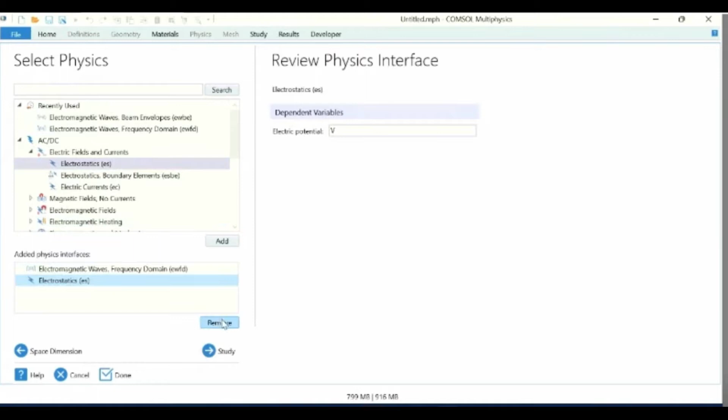The first one is EWFD, and the second one is electrostatics. So we will continue with these two physics in this experiment. General studies we can use for electrostatics. We are concerned with

The entire experiment has been divided into three phases. The first phase is to optimize the dimensions of the waveguide in which the light has to pass. The second step will be to optimize the distance between the waveguide and the electrodes that we are placing. And at the third step, we will see how the phase is related to the potential that we apply across the waveguides.

So, in first step, we will define the parameters. What parameters we require, we will put one by one. And since this experiment is an SOI based experiment, which means silicon on insulator, for the insulator we will be using SiO2, silica glass, and to extract the refractive index of silica glass, we will have to use the Sellmeier equation.

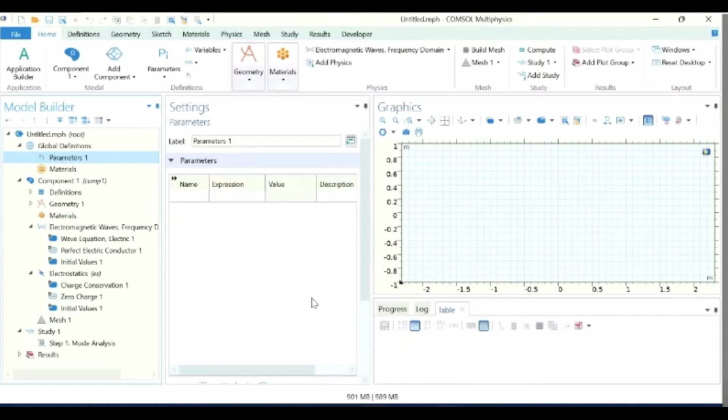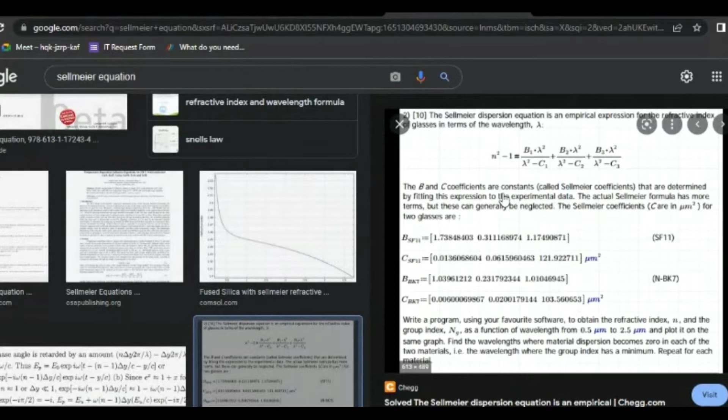So here we can see this is the Sellmeier equation. The Sellmeier equation is used to find the refractive index when any monochromatic light of one wavelength passes through the medium, through SiO2, and how the refractive index of SiO2 changes. As we can see, there are certain constants, and these are the coefficients that we will use.

Now we can define one more variable of voltage that we will use for giving the voltage supply across the waveguide. After this we can define the variables for defining the geometry. For geometry, there will be width, height, and length, or we can say the depth of the waveguide, as well as the electrodes.

So for height of electrode, we gave it 200 nanometers, which is a standard value of fabrication. This is the standard height that we very often use.

Width of the electrode. Now this parameter we have to optimize with respect to the confinement and the modal effective area. These will be the factors on which we will decide what is the optimized value of the width of the electrode. So for now we will just keep it 400 nanometers. This is a random value. Later in this meeting we will know what is going to be the optimized value of it.

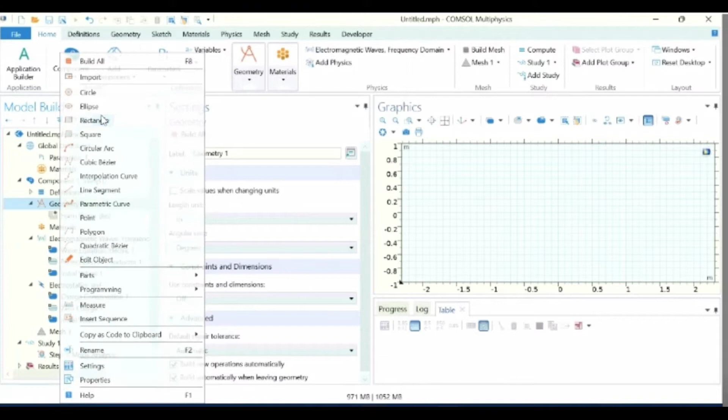So for that, we will define a rectangle, which we call waveguide. It will remain solid. What would be the width? So width will be W wave. Let's see what I have defined. Yes. So here it will be W wave, and here it will be H wave. Position will be from the origin, because we want to keep it symmetric, and base is going to be center, and everything is looking good. So here we will build it. So here we get the rectangular waveguide in which we will be injecting the light and analyzing.

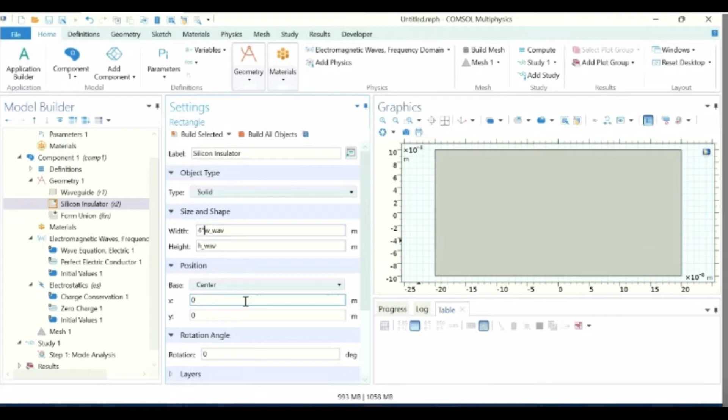After that, the next thing we have to define is the silicon insulator on which we are mounting the waveguide. So for that, let's call it silicon insulator. It will again remain solid. For the silicon insulator, what dimensions can we take? It depends on us. So we can take it like 4 into W wave and height of H wave. Let's see what I've taken here, then accordingly we can take it, although it really doesn't matter. Yeah, width of box. I have already defined other parameters.

Define a parameter. Width of box, and we can put any random value to width of box. Let's just try with 1 micrometer. Then it becomes width of box. And similarly, we can define H box. Let's say 800 nanometers. And change the values as per our convenience.

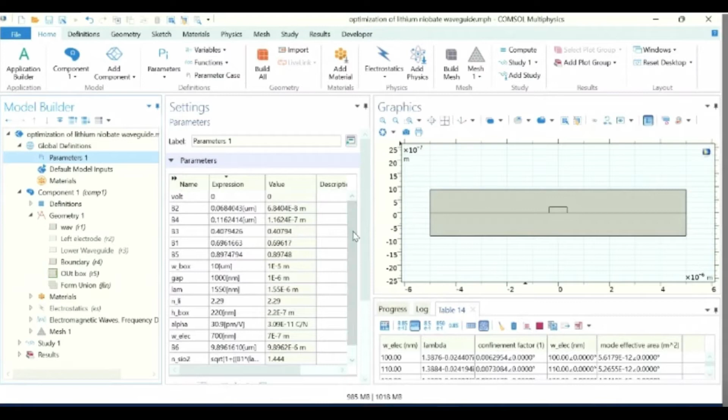Here we are using H box of 200 nanometers because the height should be 200 nanometers. Accordingly, we will make the geometry.

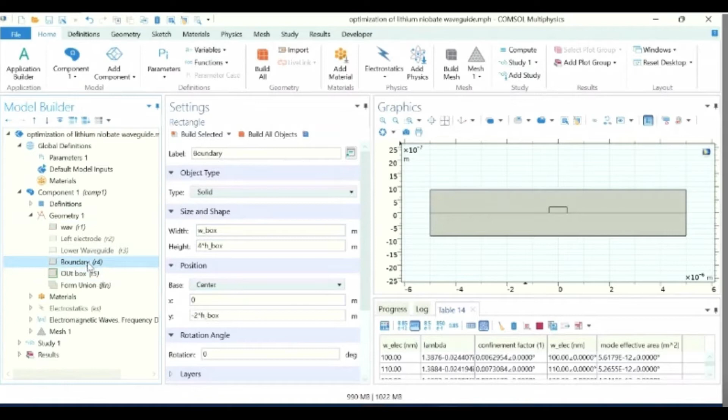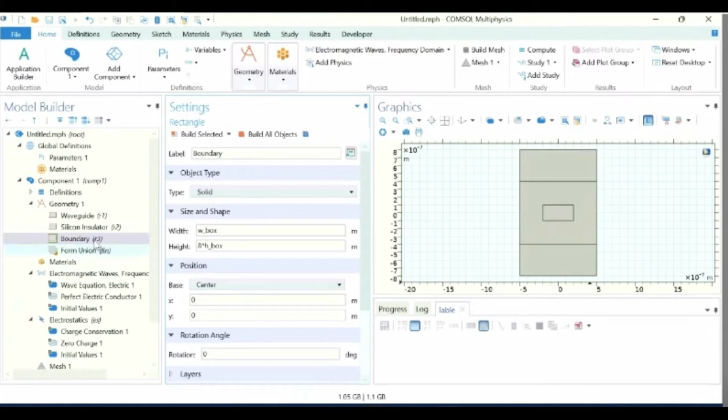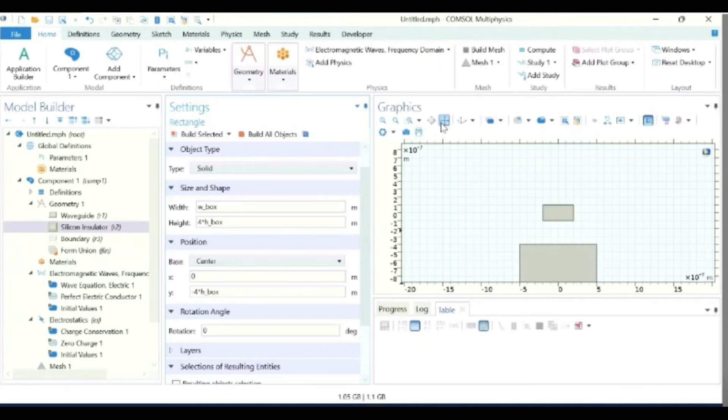And similarly, we define an outside boundary. Okay, so now we have to move down the silicon insulator because we want such geometry.

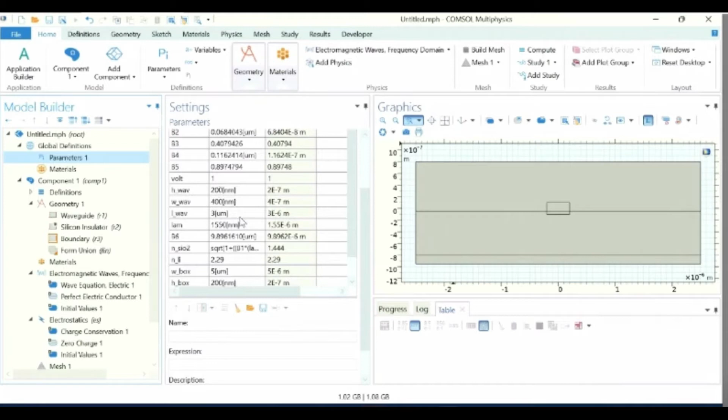So here our geometry is almost ready. If I summarize what I did in this geometry, this domain is the silicon dioxide, SiO2, silica glass, and this is the background. It can be embedded into it.

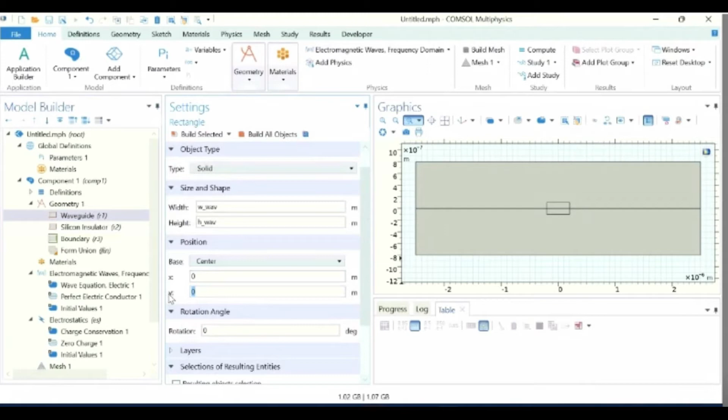So this is the cross section of the entire SOI system, on which the fabrication of the waveguide will be done. And this particular area, this small rectangular domain, is the waveguide that will be doped by lithium niobate.

After this, we will define the materials. For that, we will add materials from the library. We will add lithium niobate, so I will search lithium niobate. There are two options; you can use this one. So this is lithium niobate. One more substance I have to search is silica glass. Now I have two materials that I have imported.

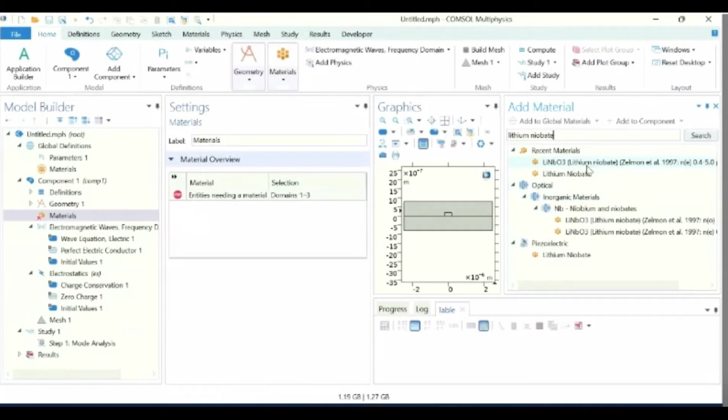Lithium niobate. First I will choose the domain. Only this domain is lithium niobate. In this section, refractive index, I will define the refractive index of lithium niobate, which is NLI minus 0.5 into... Now here I have to define one more parameter, which is the Pockels coefficient, or you can call it Kerr coefficient. It really doesn't matter. I will call it alpha, and alpha for this is 30.9 picometer per volt.

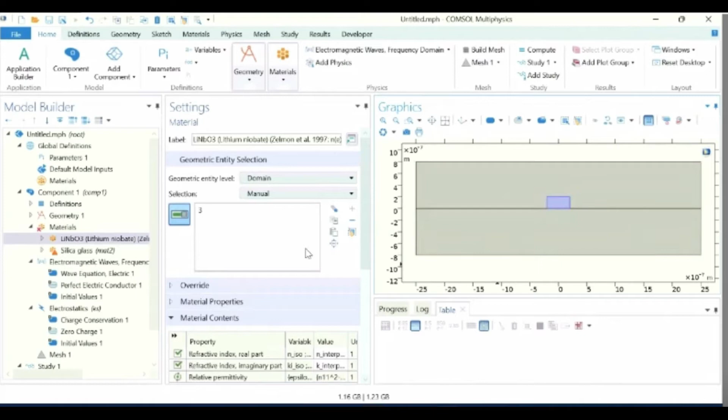I will use it in this definition of refractive index. NLI minus 0.5 into alpha into, sorry, NLI cube into es.normE. I think it's correct. Let me check. Here NLI is the refractive index of lithium niobate when there is no impact of electric field. So NLI minus 0.5 into Pockels constant into cube of NLI into the electric field.

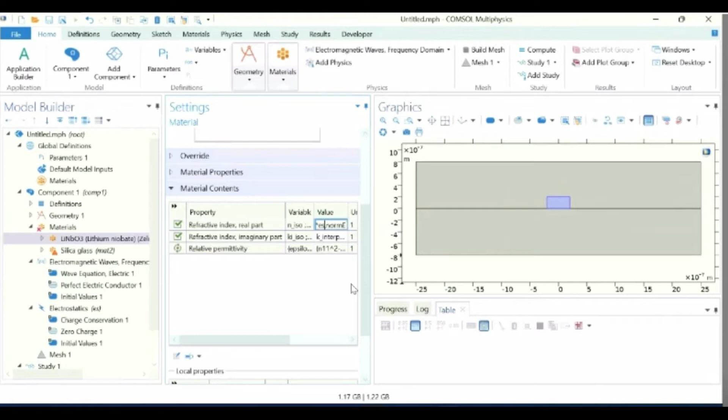Here es.normE is the electric field when the potential is applied across the waveguide, that is the lithium niobate structure. Since I have not defined any electrodes so far, because I'm not concerned with the electro-optic effect right now and I'm optimizing the dimensions of this waveguide, the electrode or potential is of no concern for now. So this term es.normE will become 0 for now. I showed this formula because I will use it in further parts of the same experiment. So here I'll just use NLI, which is 2.29.

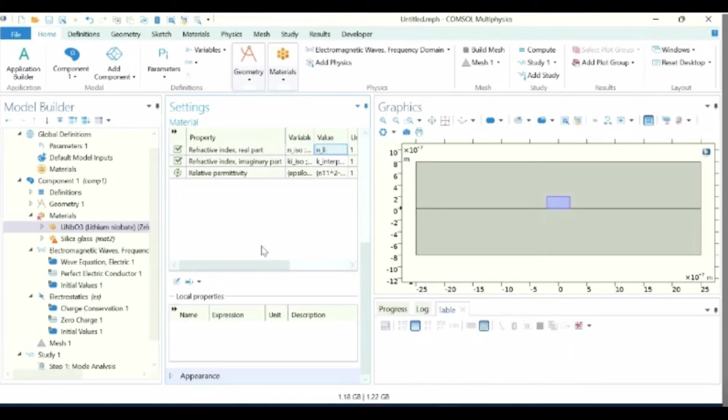Now let's define SiO2, the refractive index of silica glass. Here I will use NSiO2, which I have received from the Sellmeier equation. So this part of the job is done. Electromagnetic wave equation: let's check if it's correct. It's totally right. This formula is defined with respect to refractive index, and the refractive index is taken from the material we defined in this section. It's giving me some warning. I had not defined the domain, that's why it was showing the warning. Now it's resolved.

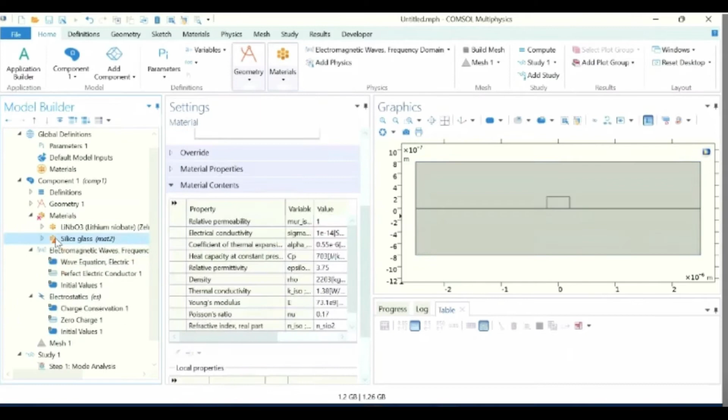Initial values, let's see. It's correct. Electric field initially has been put 0, so a zero initial condition is taken. Electrostatics is not required for now, so we can disable it; however, we will use it in the future. Now we will create the mesh, physics-controlled mesh. Free triangular for the entire geometry, extra fine, and build all. So here the mesh is created, as you can see it's good to go.

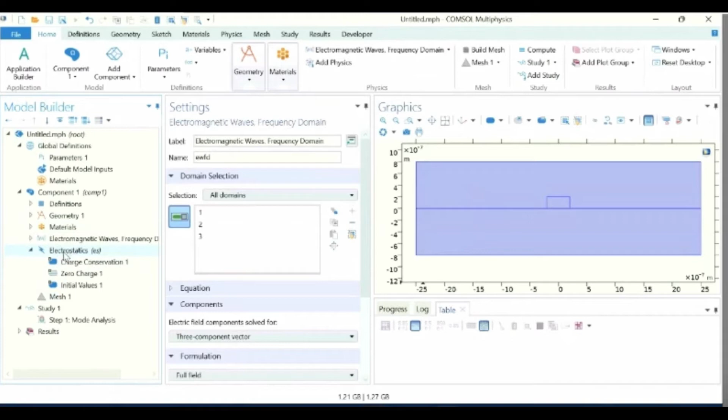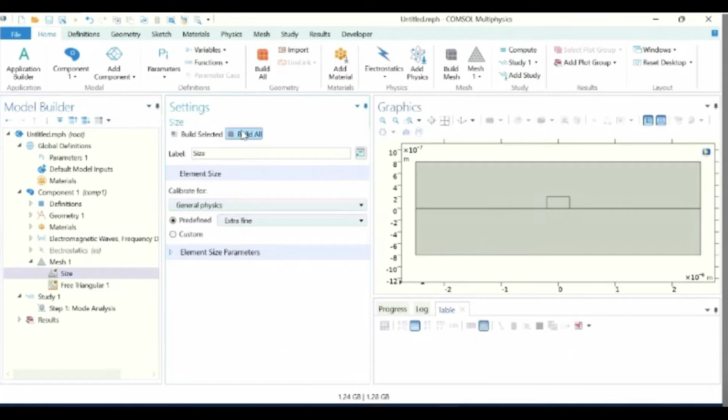Now we will do the mode analysis. Before doing it, you have to change the value of lambda. Starting with this mode analysis, let's find it for 30 modes, and a region around 1.4 is a good approximation. Compute. Okay, we are getting something, though it's not good. Let's check the others. As you can see, there are no modes inside the waveguide that are acceptable, not the ones we are looking for. So there are two options: this one and this one. Let me start again.

Once again, I will do the mode study, but now it's around 1.44, because in the last study, as we saw, we are getting a mode around 1.44. This time it will be only 2. So we have got these two modes.

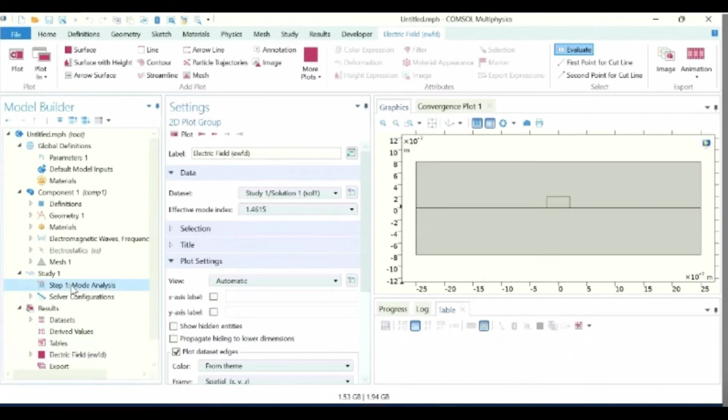Now, as we can see, not the entire power is being confined into it. What I'm saying is the entire mode is not being confined. What could be the reason for it? The probable reason why the mode is not confining into the structure and it's leaking outside is the width of the lithium niobate waveguide.

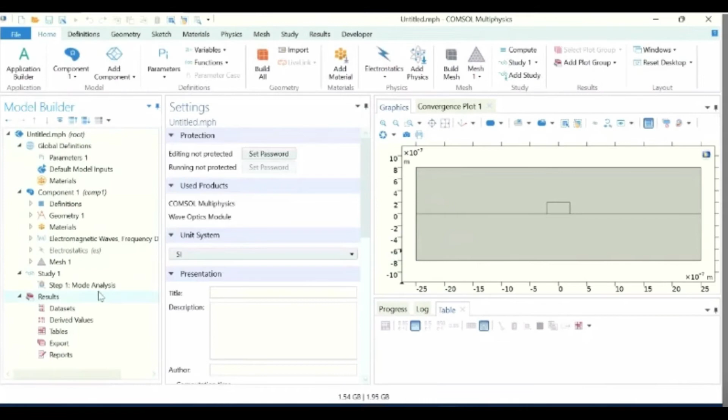So what we will do is implement a parametric sweep to see how this modal analysis changes with respect to the different values of the width of the structure. Width of wave, so we will define width of the wave. We can run it from 100 nanometers, step 10 nanometers, to 800 nanometers.

Nanometers, and everything is good. What happens? Wait for the output. It will take a while.

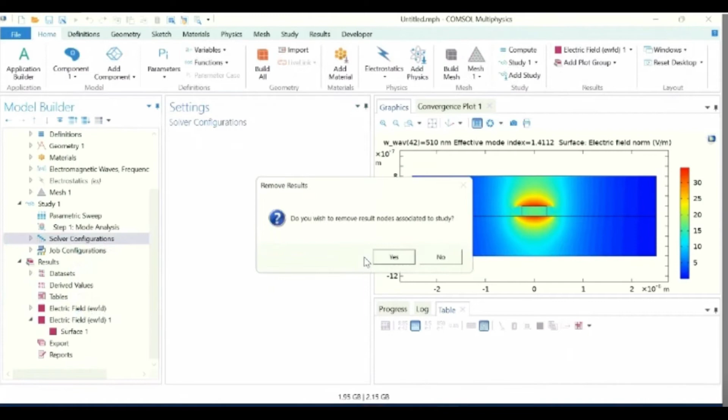Here we will have to define the scattering boundary condition. Since I did not define it, I wasn't getting the correct output. So you have to take care of this as well, that you properly define boundary conditions, because not defining the boundary conditions may give you the wrong outputs.

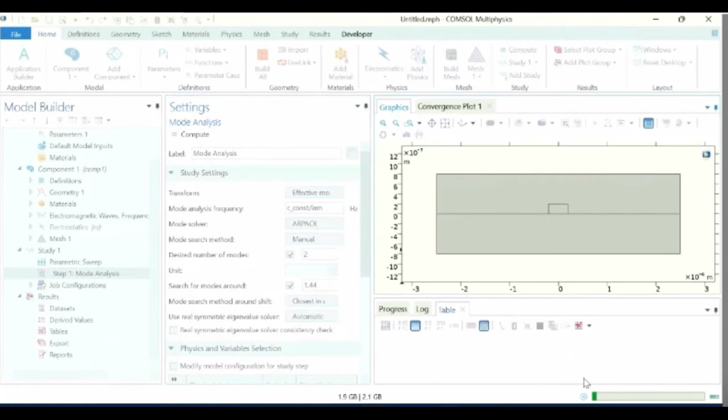Okay, now I'm getting better results. Now I can run the parametric sweep. Let's see what happens now.

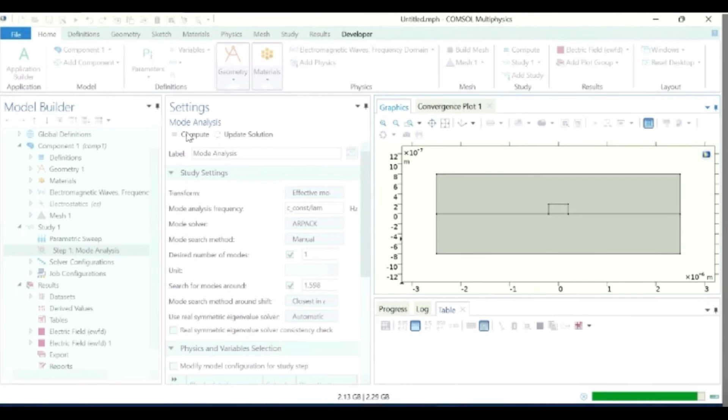So what we will have to do is find the power residing in the core, that is this particular region, divided by the power residing in the entire concerned structure. For that, we will define two integrations. Let me show you how we can define the integration. Go here, you get the option of integration. Let's say I'm defining this for the waveguide region integration.

I will use the domain. This is the domain in which I have to integrate, and it's integration order 4. Rest all is good, and the remaining one I have to do for the entire body, so entire geometry. I will choose the domain accordingly and in the same manner. Now I have defined two different integrations. Okay, I'm good to go.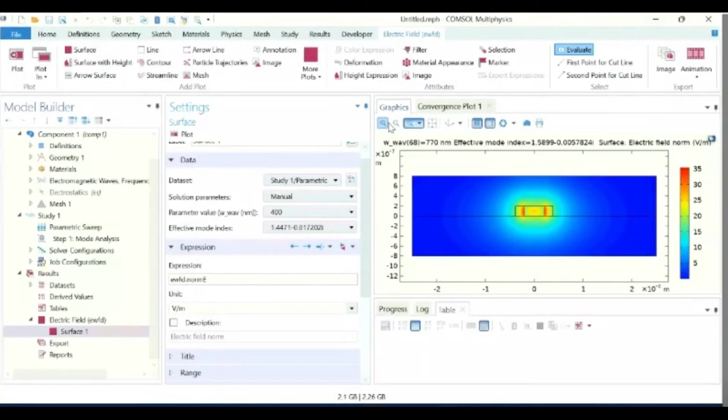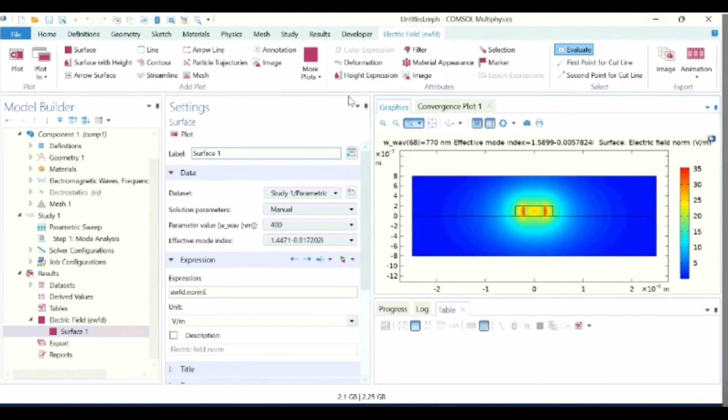Now here I can do the analysis of confinement factor and modal effective area using their respective equations. From here, you can use the integration that we defined previously, from non-local couplings. Here it is, intop1, so I will use intop1, and the parameter I have to use: I have to find the power, and the power can be evaluated using the square of the electric field.

So we can take the whole square for the confinement factor, and if I have to evaluate it as a percentage, I will multiply it by 100, and this will give me the confinement factor.

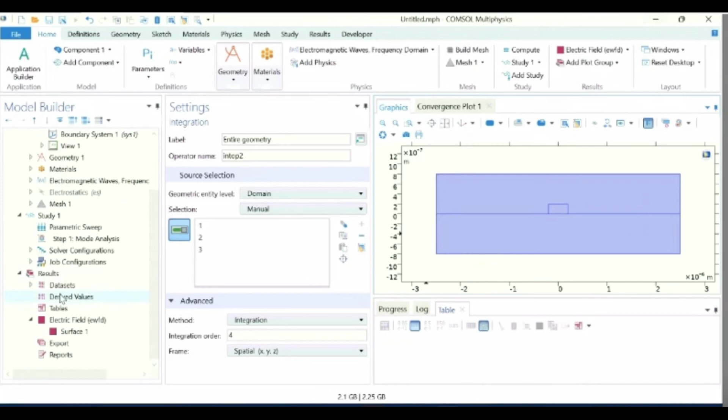Okay, our next target is to find the modal effective area. Let's see what the equation is for modal effective area, if I can find it, because it's really very hard to remember the equations of these values.

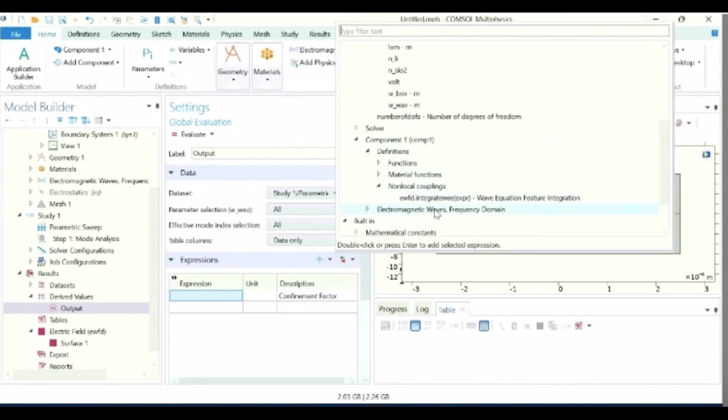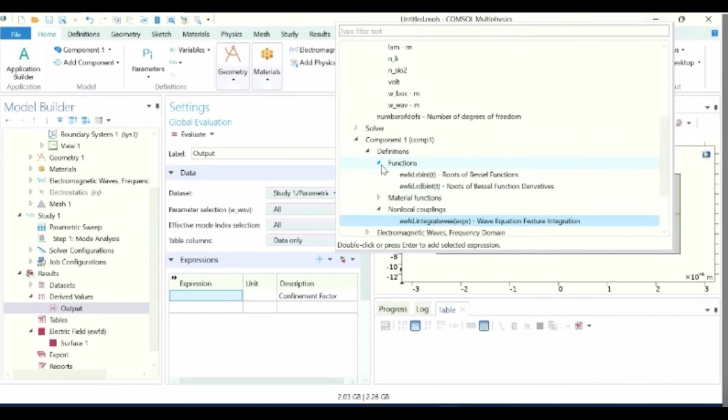Modal effective area. Okay, so here it is. I can use this equation. So it's the square of the entire integral divided by the power 4 of this integral. Whether this equation is correct or not, first we will implement and then we will check whether it's the right equation or not.

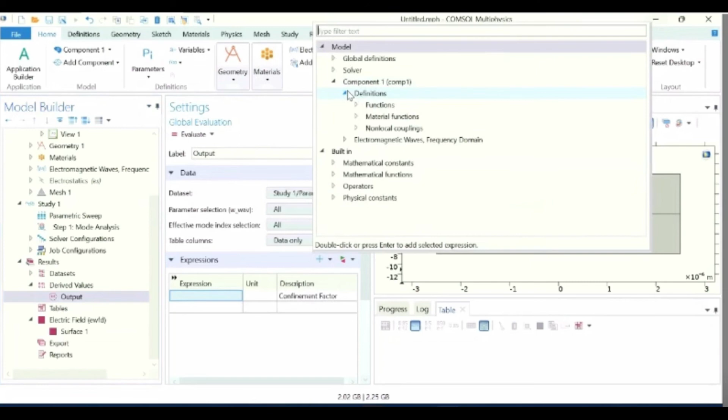So intop1 and ewfd.normE, the integral. Square of this integral. Square, oh sorry, square of this integral. So, square of this integral divided by intop2. Let's see, intop2 power of 4. So ewfd.normE power 4.

See, this is, yeah, we check it intop1: integration of square, square of whole, and integration of power 4. Is it the same thing? Yeah, it's the same thing. Okay, so the entire configuration has been set. This is modal effective area, and this is confinement factor. We will evaluate. Okay, have to rerun it.

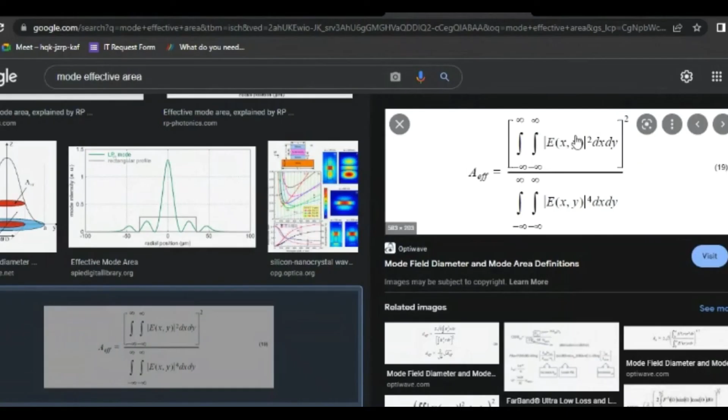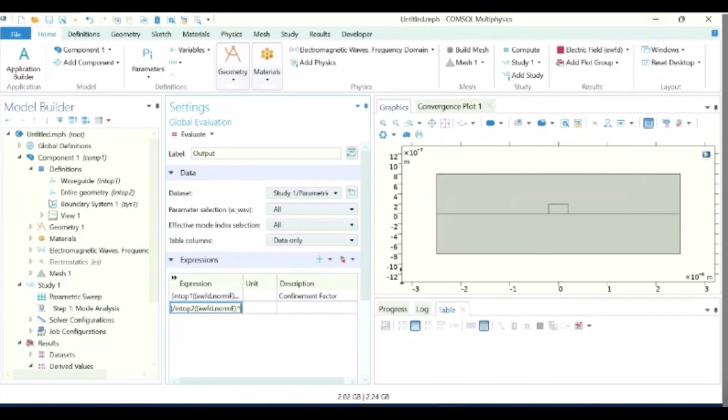Okay, so here I can see mode effective area and confinement factor. I think there's something wrong with this, because as you can see, it's displaying it as 1 by meter square, which should not be the case. Let me check what is wrong here. Okay. That part was wrong, so let's type it 100. Right value, okay.

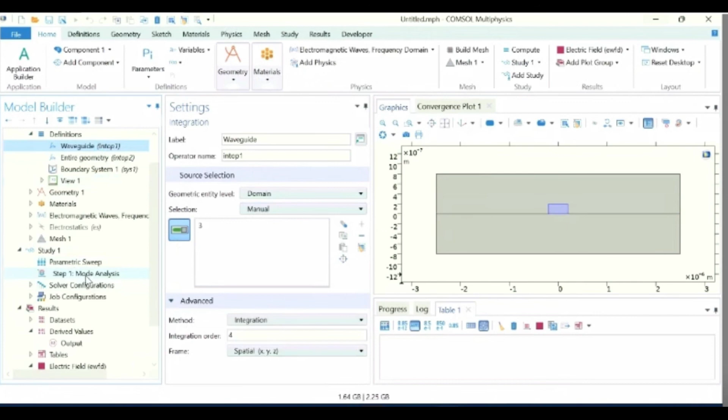Now let's copy it and let's make a new Excel file, and mode effective area.

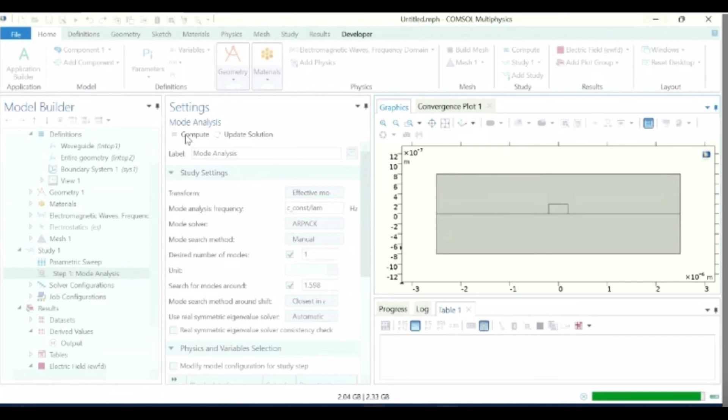And evaluate. So let's check now. Yeah, now it is correct.

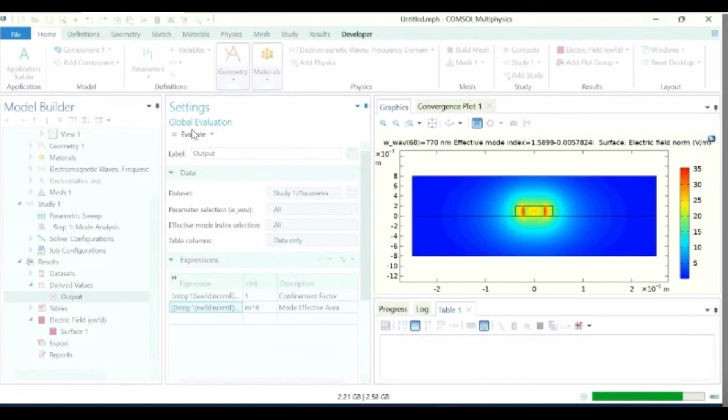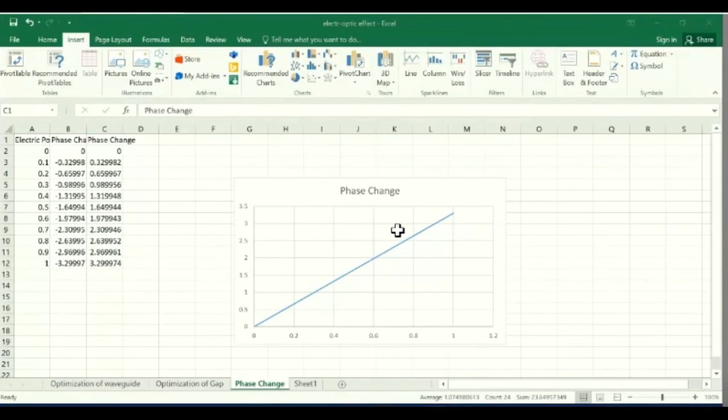So obviously it is desirable to have a highly dense optical field distribution, so the modal effective area should have a very low value. So on inspection, we can see that from 600 nanometers, it is almost flat, significantly less, and tending to zero. And on the other hand, as you can see, the confinement factor refers to the ability of the

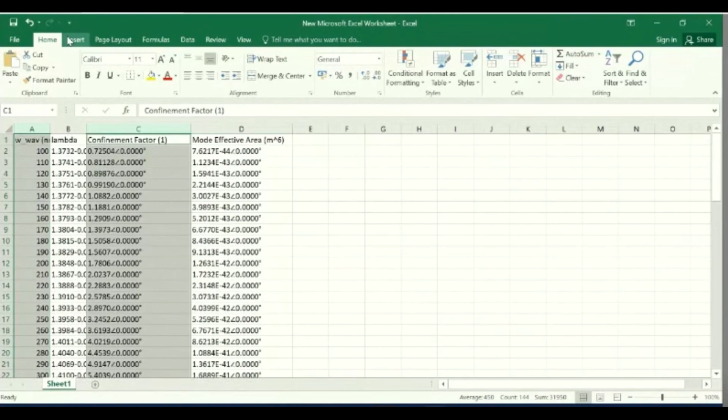waveguide to confine the modal distributions inside the waveguide of lithium niobate. So it's pretty obvious that we need a higher value of confinement factor, so that more modal distributions could be confined inside the waveguide. So a higher value of confinement factor is desirable, and as we can see, at 600 nanometers it is nearly about 27.127%, which is okay for electro-optic effect.

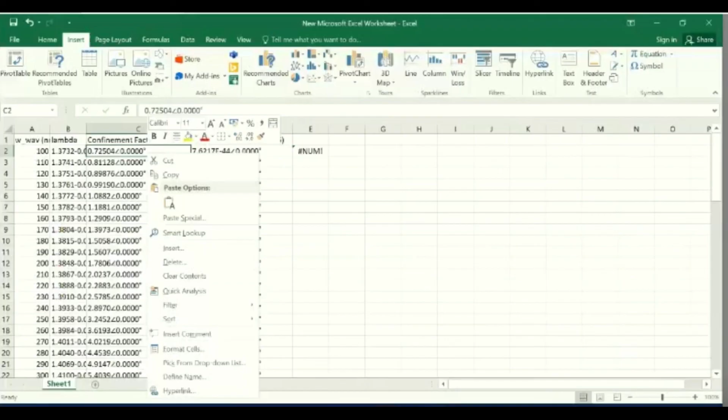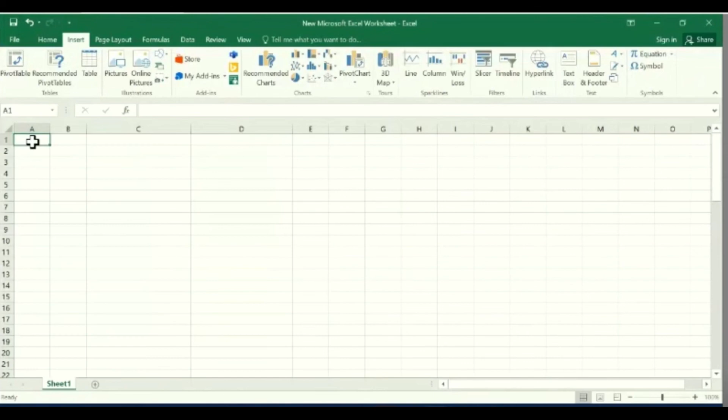So taking the intersection of both the results, we can conclude that at 600 nanometers, your waveguide design is optimized and giving you satisfactory results. So now I can make it 600 nanometers here. I can remove parametric sweeps. Let's just disable it and run it for one last time and see whether we are getting

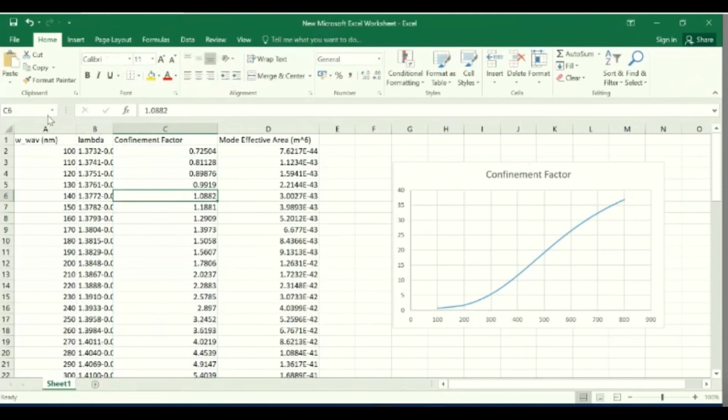good results or not. Yeah, now you can see a major portion of power is confined inside it. A very dense modal distribution is in this particular area of the waveguide, which we require for the wave propagation. So with this, the first step of optimization of the width of the waveguide is completed.

Thank you very much for watching this, and in the next part of the same experiment, our agenda will be to optimize the distance between the electrodes and this particular waveguide.